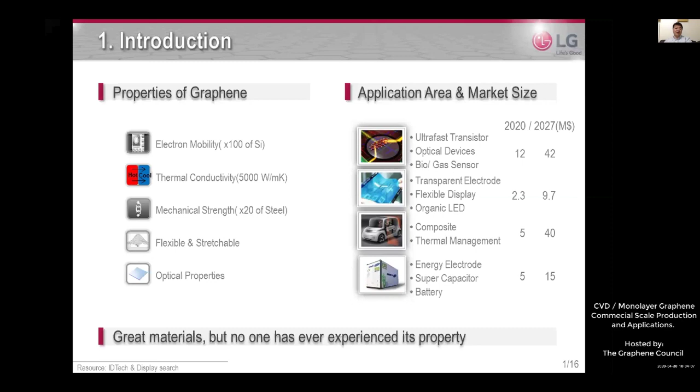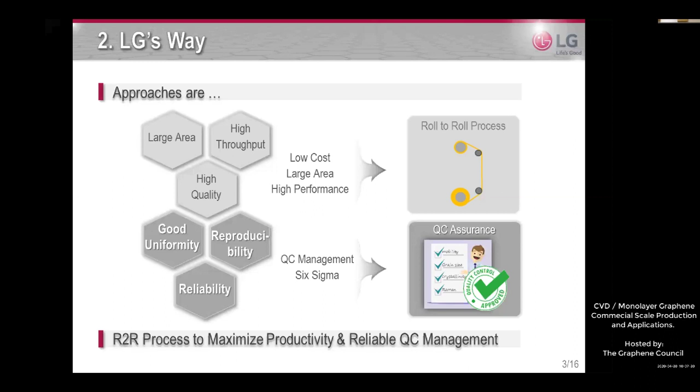It is a positive role and contribution of LG Electronics for commercialization of CVD graphene. Various systems have been considered for large scale and mass production. Among them, the roll-to-roll CVD process is more suitable to maximize productivity.

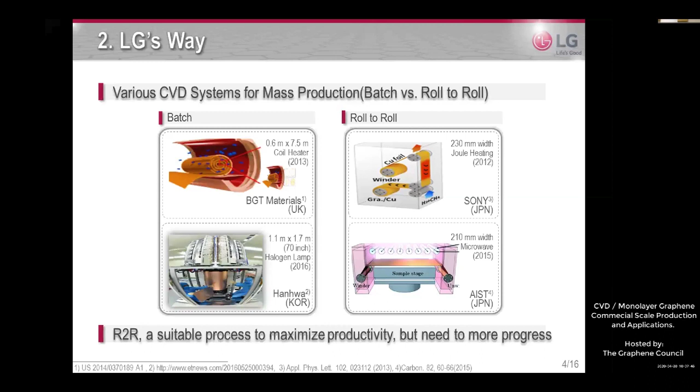I introduced the LG Electronics CVD graphene system. The first generation is a large scale system but impossible for mass production, so we developed a mass production system. The second generation is a vertical roll-to-roll CVD system with 150 millimeter width.

Quality, reliability, reproducibility, and productivity were secured, and it is operating for mass production from last year. It's at pilot scale stage, with a capacity of about 5,400 square meters per year.

To maximize affordability and availability, we developed a large, double roll combined with a high-speed system. We completed verification for mass production using our strict rule of quality control process, and it is now operating as a pilot production stage.

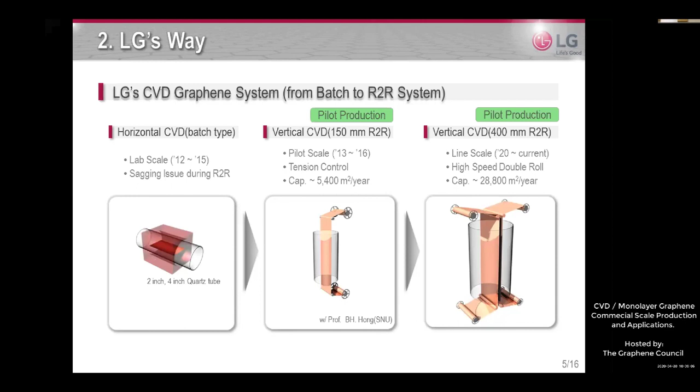Its capacity is 28,800 square meters per year. It's a huge amount. Here is the actual picture of our roll-to-roll CVD system.

Here's a practical product using this system: a 400 millimeter width CVD graphene roll with over 20 meter length. Here is our equipment specification.

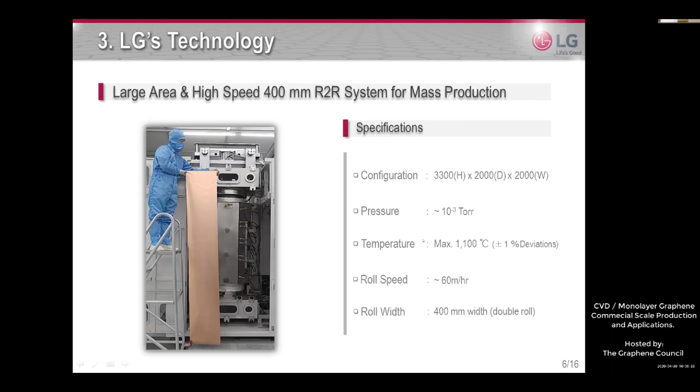Control of crystal orientation of the copper substrate is a key factor for high quality graphene growth. The vertical geometry could adjust the copper crystal orientation for optimized graphene growth. Graphene growth under tension using the vertical CVD system shows larger grain size and less defect.

We control the grain size, as shown in the SEM image, from 5 square micrometers to 200 square micrometers, and we also minimize defects such as multi-layer dots. In this image it is very clean; only a few multi-layer dots exist, but normally there are lots of multi-layer dots in CVD graphene samples.

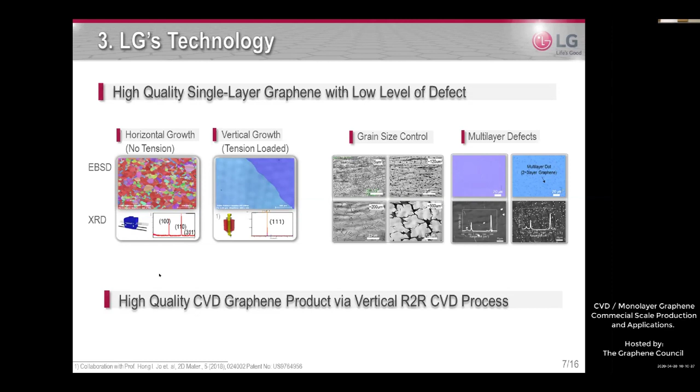By enlarging the grain size and minimizing defects, excellent electrical performance was obtained. Yes, it is true for high performance of graphene. We keep trying to grow CVD graphene with large grain size and zero defect.

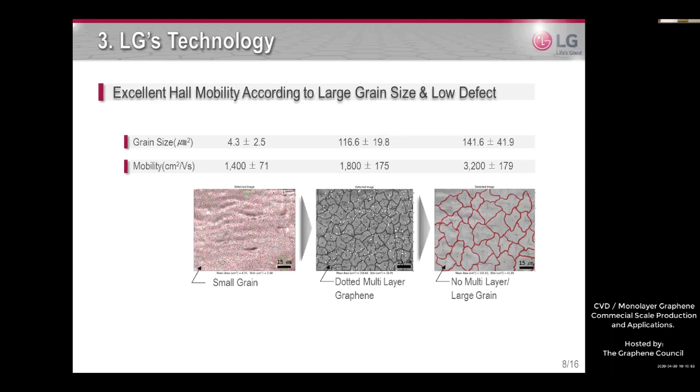Quality control is a very important key to secure uniformity, reliability, and reproducibility. We evaluate the entire product. All graphene rolls were cut at this scale, and all samples have been checked at least 50 points for sheet resistance evaluation. As a result, the sheet resistance value is about 255 ohms per square with 10% standard deviation, which is our LG rule for quality control, so the distribution is very narrow.

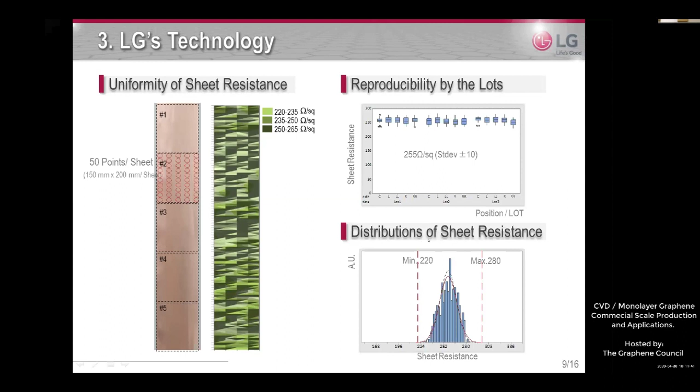The grain size, layer uniformity, crystal quality, and crystal orientation of the copper foil are also evaluated for quality control management.

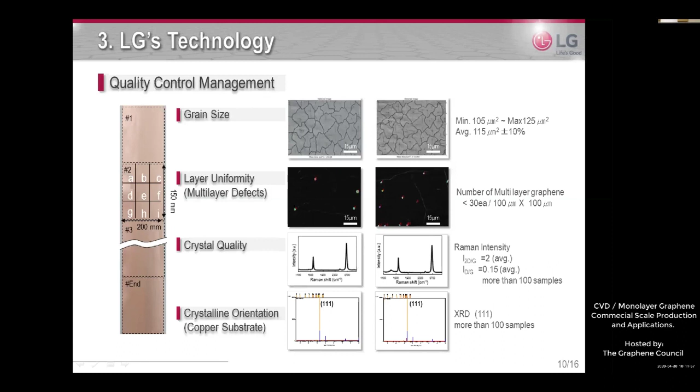LG has a well-established quality control process. It is very detailed and very strict. In order to confirm the quality of CVD graphene grown by the vertical roll-to-roll CVD system, all products are evaluated as aforementioned, and the quality control process is manualized in a detailed and strict manner.

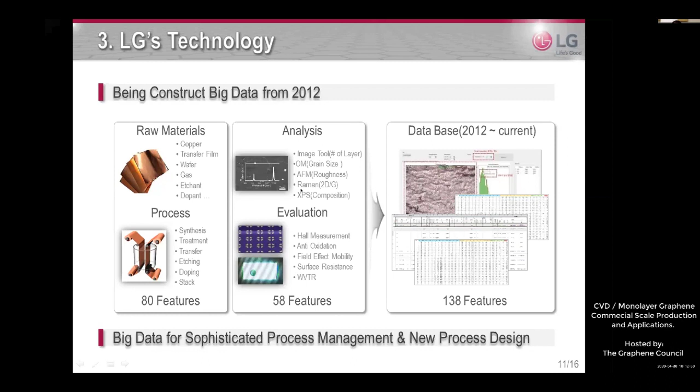Product inspection and quality assurance are reported per product. LG collects all evaluation data and constructs it as big data. The database consists of 138 features for raw material, process, analysis, and evaluation. It is finely managed for quality control and process optimization.

Here is the application and our vision. CVD graphene could be applied as a new material platform for the IT-BT industry, used in display platforms such as transparent electrodes, barriers, and flexible displays. Nowadays new form factors like foldable or flexible displays are coming, and we believe CVD graphene has a chance to be applied in this area.

Electronic platform applications include high-speed RF devices and sensor devices. The bio platform is nowadays very focused on because of the COVID virus. CVD graphene is well-known as a bio-friendly material, very friendly with tissue and cells, so it can be used for biocompatible materials and biosensing.

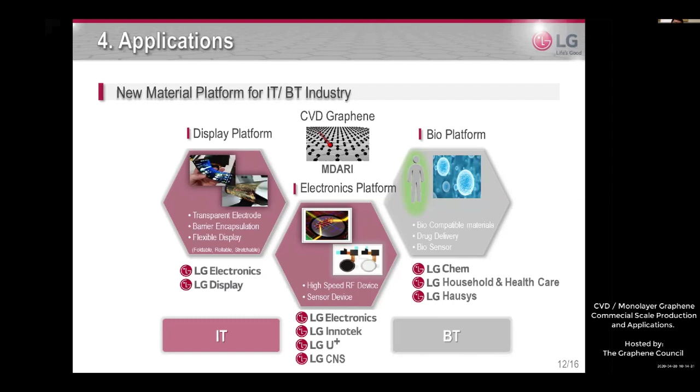Basically, we focus on developing mass production of high-quality CVD graphene, so we welcome collaboration to find the killer application. We have good relations with our group companies, like LG Electronics, LG Display, and LG Chemical, so we can more easily access these companies and accelerate the killer application. We are very open for collaboration, and it is not limited to this area.

We test the flexible transparent electrode with a folding test. Only CVD graphene survived 200K times folding with a 1 millimeter radius, so we believe it can be used in the new form factor display.

Graphene can also be used in the energy platform as a conductive barrier for chemical reactions, and for the biomedical platform.

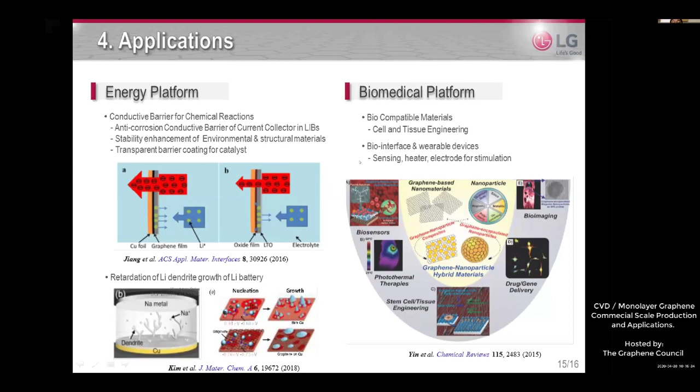Nowadays, we find that the CVD graphene is very friendly and very good, effective in the stem cell. So we believe the CVD graphene could be used in the bio platform for stem cell application. Here is a summary. We are very welcome for collaboration to find the killer application. So feel free to contact us.

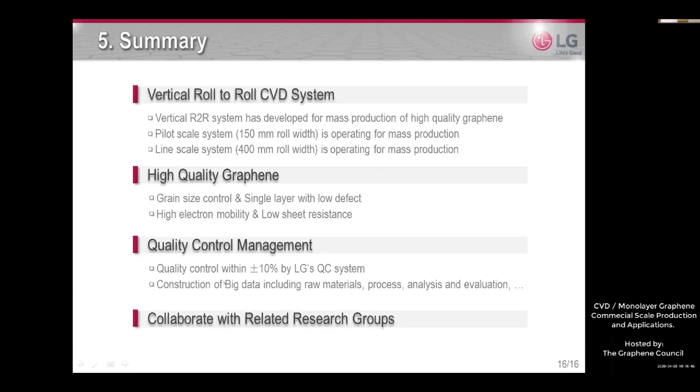Thank you, Dr. Kim, thank you very much for that presentation. I just want to highlight what the unique opportunity is here: we have LG Electronics who are producing this CVD graphene on a mass scale, but are very interested in making this available to others to develop products and applications. And then in turn, they have a very large ecosystem where some of those applications can be applied. So I think that's fairly unique in the world that we're operating in right now.

And so with that, I'd like to go ahead and introduce our next speaker, Kevin Weir from General Graphene. I think he's going to have a slightly different take and some very interesting information on what they're doing. Now, before you get started, Kevin, I just want to point out that many people will not have heard of General Graphene before, but you've been around for quite a few years. The company's been working on perfecting this technology, and just recently General Graphene has become publicly visible. They're a very valued member in the Graphene Council, so if you haven't heard of this company, it's by design. They've been working on their technology diligently for years. So I just want to point that out as we introduce you. So Kevin, it's all yours.

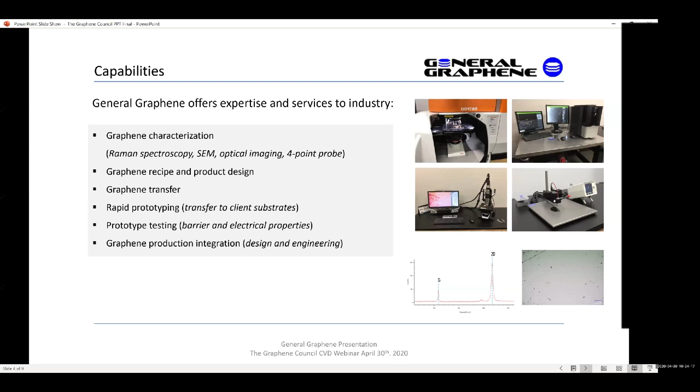Moving to prototyping, we use the customer's substrates to create application-specific graphene-coated prototypes, then measure their performance against the test conditions the application requires in the field. Finally, in collaboration with our customers, our engineering group develops industrial-scale graphene integration processes tailored to the customer's specific product and environmental needs.

General Graphene uses a different process than most other CVD graphene producers in that we grow our CVD graphene sheets under atmospheric conditions, without low pressure or vacuum. Generally, we utilize metal foils up to 300 millimeters wide in continuous lengths and spool it roll to roll, similar to what you saw before.

In short, during our process we prepare, etch, and anneal the foil substrates, encapsulate the foil in a proprietary enclosure system, then send it through the equipment at high temperature, during which a mix of gases including hydrocarbons contact the surface and initiate single or multi-layer graphene crystals.

Our process is relatively flexible. We don't have the confines of vacuum, which allows our scientists and technicians to tailor the crystal size, coverage, number of multi-layers, and defect levels. With this process flexibility, we can tune the properties to meet the needs of the specific application. The resulting graphene is very useful for barrier films and filtration media, and demonstrates additional useful properties including transparency, conductivity, strength, and lubrication for other applications.

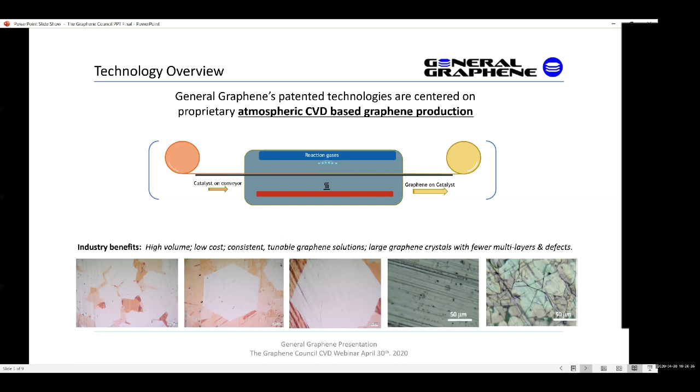So let's talk about the products. On the left-hand side we have product properties; on the right-hand side you can see some of the finished products themselves and the spool-to-spool graphene sheets. Starting with the above table, this dashboard presents a snapshot of graphene characteristics typically measured in our laboratories. We don't make standard products, so this shows the range of properties we typically test.

In the top table, note that we design a wide range of graphene properties tuned to very specific customer applications. We can change crystal size from large to very large, between 40 microns and greater than 1 millimeter in width. We can also precisely alter the surface coverage, determine the number of layers, and control the incidence of multi-layers and other defects.

Moving to the lower part of the table, the optical transmittance of monolayer graphene is about 97.3%. With 5 layers, optical transmittance remains typically 87.2%, and even 10 layers of graphene offers an optical transmittance of 76%.

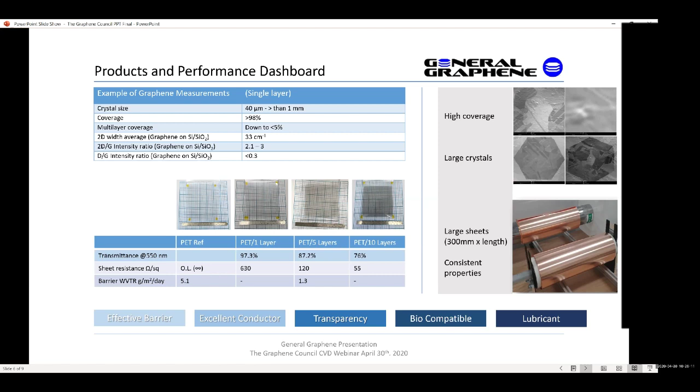So how are these properties being applied to industry? Well, this dashboard describes four key industry areas where we either have active projects or are shaping projects in our new product development pipeline.

On the theme of conductivity, our films have values in excess of 2000 watts per meter per degree in the XY plane. This property can be exploited where thermal management is important, for example, in microelectronics and automotive composites.

Graphene has important resistance properties, and we reach 50 ohms per square depending on the component's transparency requirement and number of layers. This property is particularly attractive, again, for transparent conductors.

Moving to barrier films, our graphene-based barrier films have been shown to reduce the permeability of various gases such as water vapor, oxygen, and even helium up to several hundred times, depending on the number of graphene layers or its transparency and the polymer substrate type and thickness.

For example, we are currently using these properties to develop desalination membranes that retard the rate of biofouling.

In another example, we have produced graphene polymer laminate composites with a tunable effective electronic conductance up to 10 Siemens per centimeter, and increased tensile strength and modulus of the polymer by up to 50%, depending on the number of graphene layers used. So you can see that graphene performance can be developed to tune to many different application challenges.

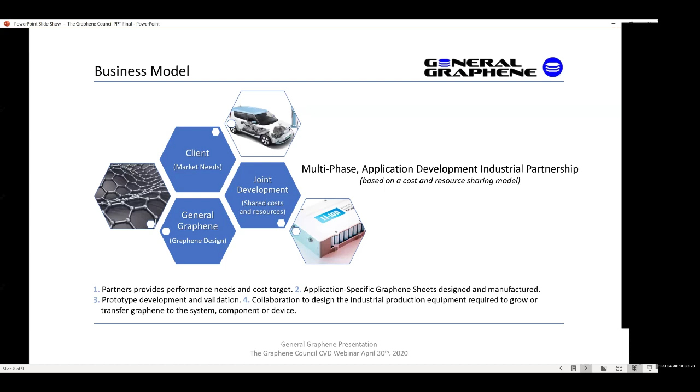The costs and resources are shared between the companies, which supports funding, promotes collaborative buy-in, and the acceleration of the project's timeline. So to summarize, we have described the company's approach to tackling the barriers to industrial commercialization of CVD graphene sheet.

Again, General Graphene's focus is making application-specific graphene sheet at scale, graphene which is consistent and magnitudes lower in cost. We do this while maintaining a focus on industry-specific graphene needs and offering our expertise in characterization, prototyping, and collaborative engineering to support industry in managing this new material from development through to commercialization.

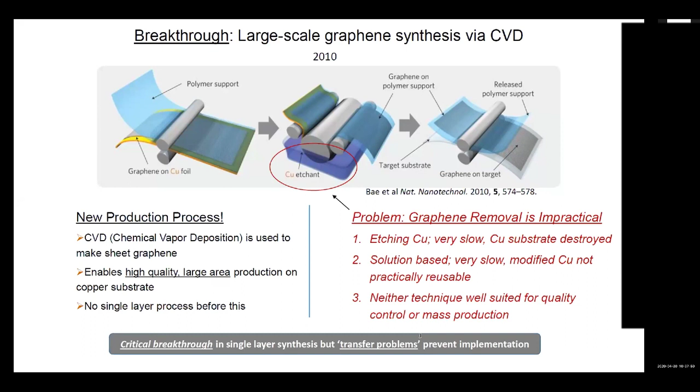So we have a patented process to remove graphene from copper without destroying the copper at all. We reuse the copper growth substrate, and as it turns out, the more times you use the same piece of copper, the better and better quality graphene you get. Our process can be done on a roll-to-roll basis, meaning it can be done in minutes versus the sometimes hours it takes to acid etch copper. And the equipment it takes to do our process is off the shelf—it exists in industry today, very well understood processes.

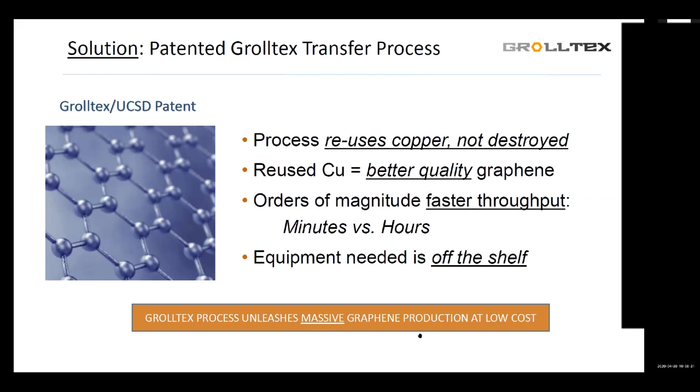This is kind of what it looks like. So what you're looking at here are the three basic steps it takes for us to make graphene. Step one, on the top, is CVD graphene synthesis—a very well understood process that's been used for decades. Step two is where our patented secret sauce kicks in: we metallize that graphene on copper.

The reason we do that is this nanometric layer, in this case of nickel or cobalt, has a 7 to 10x adhesion rate compared to the copper. In other words, the graphene wants to stick to this new nanometric nickel layer much more than it wants to stick to the copper. So we put this nanometric metallization on top of the graphene, grab it, pull it away from the copper, and then on a roll-to-roll basis, that copper can go back in the line to make new graphene.

That's step two. Step three is the equipment—this is basic roll-to-roll thin film processing equipment, and again these are processes that have been around for decades. If you think about this roll-to-roll process, it's really nothing more complicated than if you open up a bag of chips and see that the inside is metallized. That's the scale of the roll-to-roll films we're talking about.

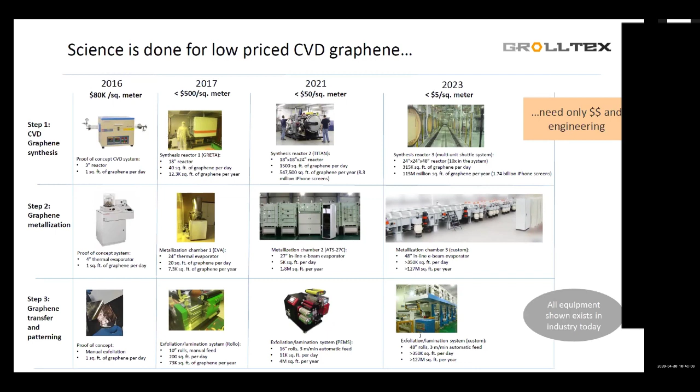So to summarize this slide, we believe that, from our perspective, the science is done for transfer, and what's really needed now is to spend the time to do this when there's a market need.

Here's what I mean by market need, and I'll just speak for our example. When we started the company 5 years ago, we thought the first breakout application for what we were doing was going to be displays. Of course, the display makers were going to want flexible displays made out of graphene. That was our path at the time. So we went out and talked to all the display makers, all the big folks that you know.

We also went one layer deeper and talked to their films providers, the electronic films manufacturers of the day. What you're looking at here is, circa 2015, a representation of what the future display materials roadmap was at that time. As you can see, graphene is on there. So when we talked to the display makers and showed them what we were working on, they all said, hey, this is great—what you're working on is very important.

Come back and see us in 10 years and we'll have something for you, they said. We were probably 2 or 3 nodes early with what we were presenting. We were a startup at that time. 5 years ago, we said we can't wait 10 years, we have to figure out something else. So we shelved that for now. We still have this technology, obviously, but at the time we had to make a business out of our business.

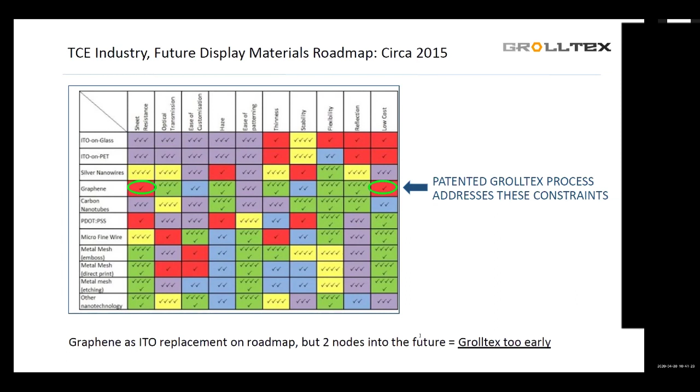So we embarked on what we called a 2-phase business strategy, and we started phase one. Phase one is doing what we're doing today, which is we opened a retail business selling small quantities of research materials to labs all over the world - university labs, commercial labs, government labs. We sell small quantities of 2D materials, graphene, HBN, and others. The reason we did phase one was to conduct a real-time worldwide market survey of what people were doing with graphene. With that information, we would launch phase two. Once we saw what the breakout applications were going to be, letting the market tell us that, we would launch phase two of our business and go after those markets that were buying all the graphene from us.

So if you go to our website today, you'll see that we still sell graphene in small quantities. We sell it in 3 formats. Number one, we sell it on the copper that it's grown on, because a lot of people want to do their own transfer. Number two, we sell graphene transferred onto bare silicon wafers, 4-inch, 6-inch, and 8-inch, and in probably 3 or 4 weeks we'll be doing 12-inch as well - we just finished reconfiguring the fab to do that. The third format is we transfer graphene onto your substrate of interest. Customers send us their planar substrates, we transfer graphene on them and send them back. We actually do a good bit of business that way. So those are the 3 formats that we sell graphene.

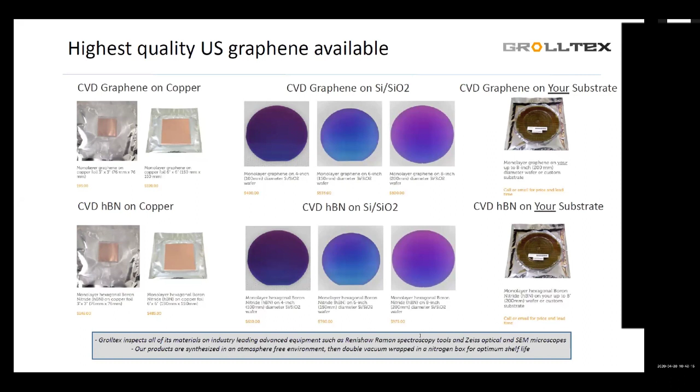So I said that we've been gathering market data from all these sales we've been making all over the world for the last 3 years - gathering what are people doing with our graphene, what are they making, what specs do they care about, what do their final products look like, that kind of thing. Let me share some of that market data with you.

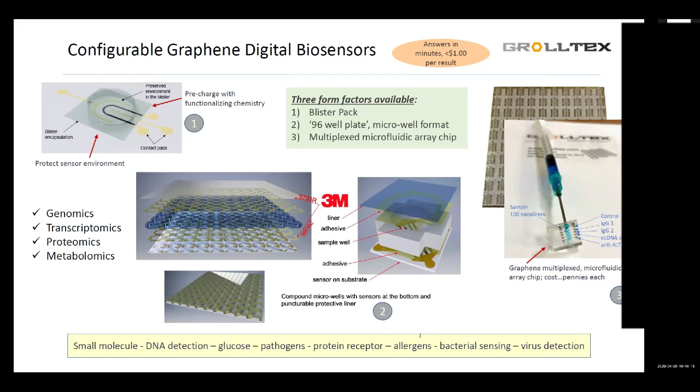So to summarize, Grolltex is ready to support CVD graphene transfer at high volumes. Again, you've seen lots and lots of great work. You just saw LG's work at high volume CVD production. There needs to be a transfer component of that. From our perspective, we've done the science of that.

We've proved it, we have an alpha unit of that rolling tool. We have a beta unit here. And when the market comes and says, we're ready for high volume CVD graphene, as you've heard other people talk about, we're the transfer guys.

We're ready to do that. Now, pivoting to summarize, for the last 3 years we've been doing this phase 1, phase 2 business, and the progression has been: number 1, to sell research materials to labs all over the world; number 2, transition that a little bit to specific sensor materials; and now number 3, we are a biosensor foundry on plastic focused company right now.